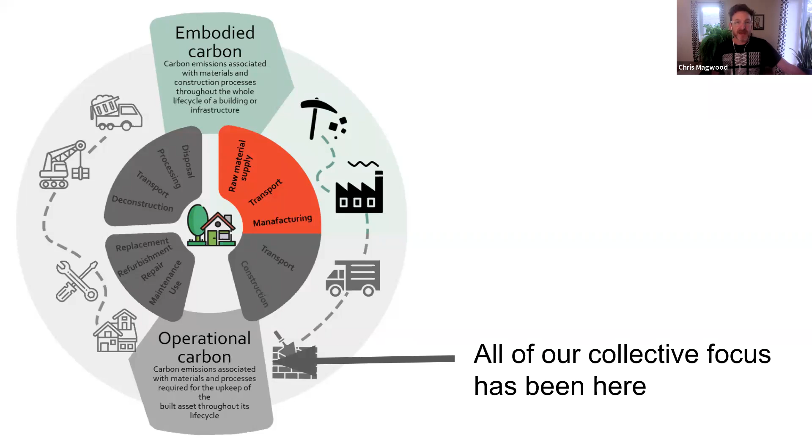So I've been in the building industry for 25 years, and myself and so many other people have put a whole lot of time and effort into trying to reduce the operational carbon footprint of buildings at all scales, with all kinds of interventions in new buildings and renovations, to reduce that very important part of the emissions footprint of a building. But the work that I'm doing now is really examining the impacts found in the creation of the building materials in the first place, looking at how big a piece of the overall carbon footprint of a building that represents, and then what we can do about it.

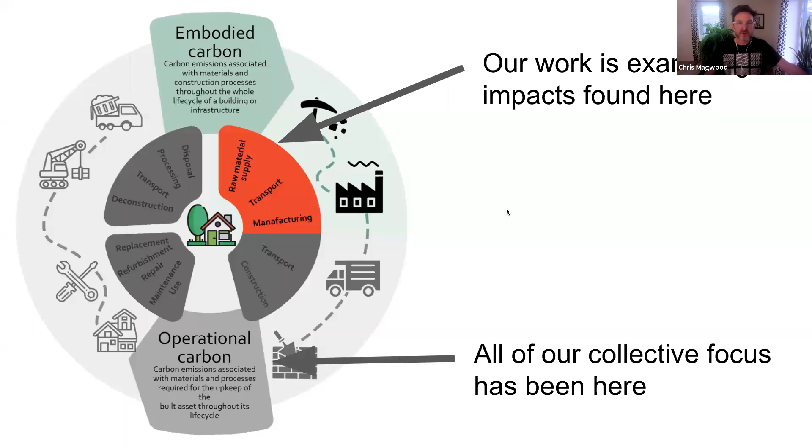And what's interesting is that in that little slice of the overall emissions pie, the vast majority of the impacts for the whole life cycle of any building material happen here at the product phase. It depends on the product, but typically somewhere between 70 to 85% of all the emissions that product will be responsible for over its entire life, including transportation, installation, maintenance and disposal, happens right up front. In life cycle assessment, this is phases A1 to A3, so raw material supply, transport, and manufacturing. This is often called cradle to gate analysis.

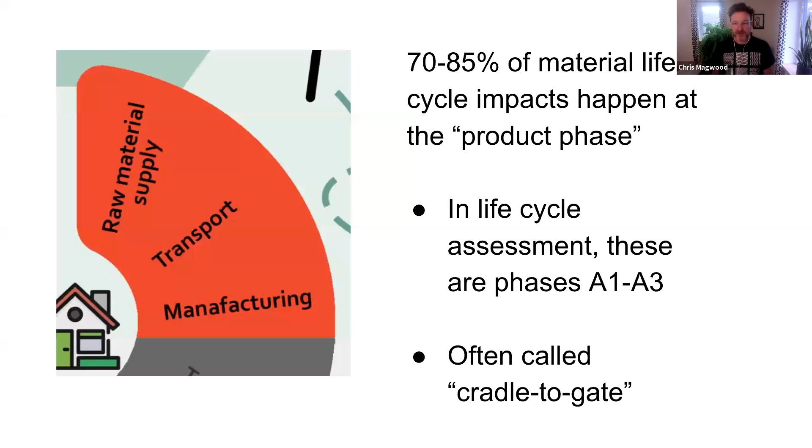So right now we're not looking at what it took to get the material from the factory to a job site or the emissions associated with actually installing that material. When I have looked at that in depth, those two factors have been much smaller than the cradle to gate phase. So, not to say that they're not important, but in terms of the impact that we can have, the lion's share exists in that cradle to gate phase.

And this kind of research has only really been possible in about the last 5 years, as more and more building product manufacturers make environmental product declarations. They are an ISO standardized way of both putting a boundary around what you measure when you look at the impacts of a building material, and the rules for doing that in different product categories. These reports actually look at 7 different types of impact, but we're really just looking at the global warming potential.

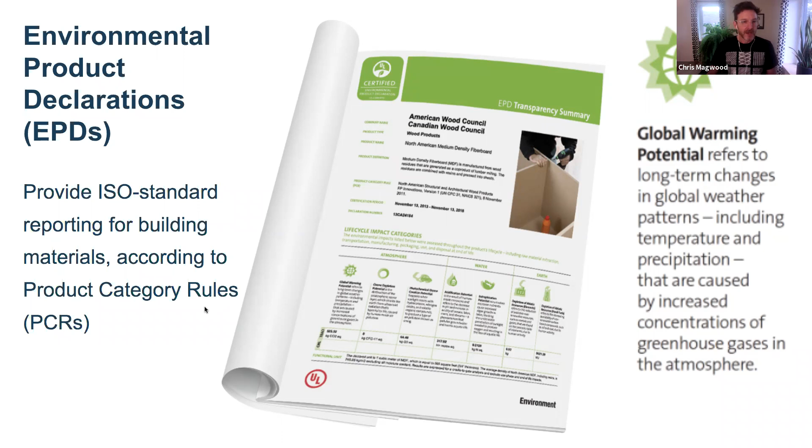So in the end, one of the things an EPD does is say, for a certain amount of this material, this is the global warming potential of that particular material. And so what we've done with CanmetENERGY is make this material carbon emissions estimator tool. They're calling it MCE squared.

It's an Excel-based program where you can put the parameters of your building into the calculator, and then select the materials that you're going to use for the building, or if it's an already finished project, the materials that were used, and you get a carbon footprint analysis of that building.

And it also uses CanmetENERGY's HOT2000 energy modeling software, so you can import the energy model from the building, so you already know what the operational emissions profile of that building looks like. And then in this tool, you add the materials piece, and then you can get a picture of what the overall carbon footprint of that building is going to look like.

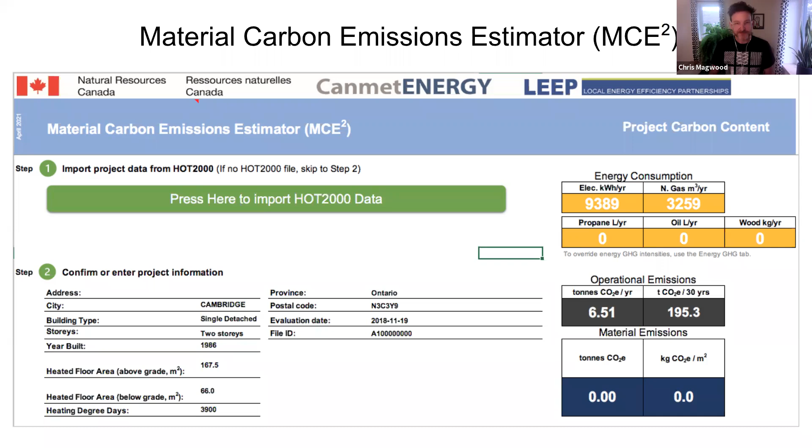So I'm going to dive into some of the results from the study. We looked at 5 different regions in Canada, and Toronto was one of them, so I'm focusing specifically on the Toronto results. Obviously, things differ depending on climate zone and codes. We looked at tier 3, tier 4, and tier 5 energy code versions of 3 different kinds of houses: a bungalow, a 2-story, and the end unit of a row house. I'm just going to focus here on the 2-story, but the rest of the housing types followed the same trajectory.

And so from the operational side, what we saw was that a tier 3, which is basically today's code minimum for energy efficiency, 2-story home in Toronto using natural gas for heating and hot water, had about 3.5 tons of emissions per year associated with those operations, and therefore, over 20 years, a 70-ton carbon footprint for that building at tier 3.

If we take the same building and move it up to tier 4, which is the highest tier you can go to in the energy code with natural gas as the heating system, we drop that to 2.7 tons per year, or 54 tons over the 20 years. So you can see making a building more energy efficient does have the intended result.

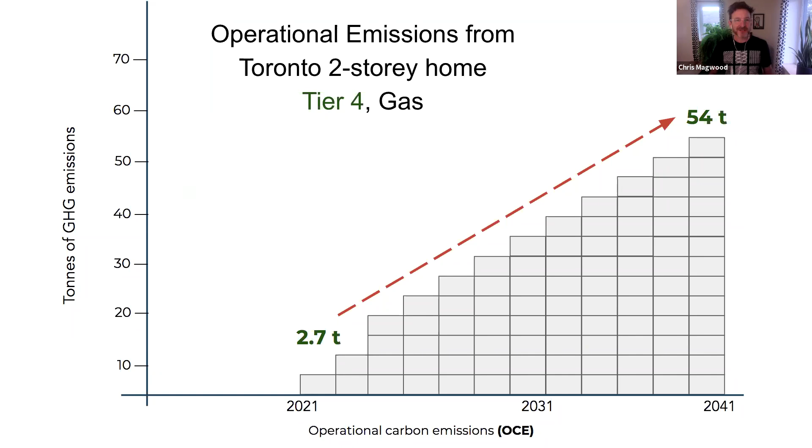But when we looked at the same building with the same level of energy efficiency, but in its all-electric form using an air source heat pump for the heating system, the carbon footprint of these operations dropped dramatically, so that even at tier 3, a regular code minimum building, it was down to under a ton per year. It was 0.71 tons per year, or 14.2 tons over the course of 20 years.

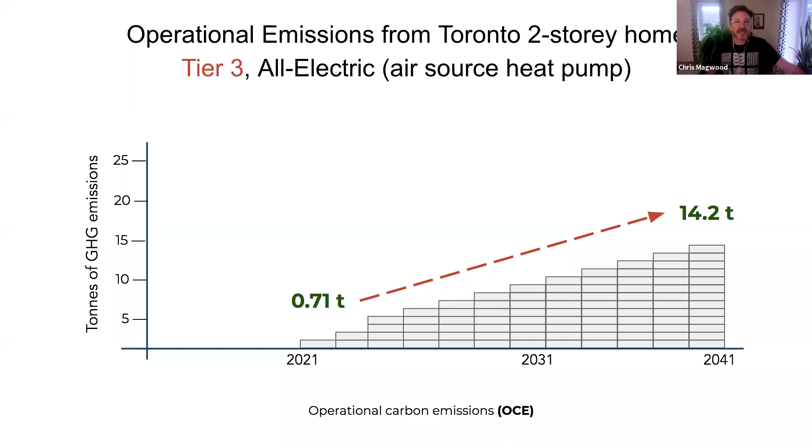So without making the building more energy efficient, just the fuel switch in Ontario made a huge difference to the carbon footprint. And if we move that building up the code,

sorry, I think my slides might be in the wrong order. Oh, no, I am missing a slide. My apologies.

When we move that building up the code to tier 5, it drops it to 0.44 tons per year, or 8.8 tons over the 20 years. So there's 2 things we can see here. One is the fuel source makes a huge difference. If we can get our buildings off fossil fuels and onto clean electricity, there's a massive drop in emissions. And also, moving the buildings to be more energy efficient also has the positive impact that we would want.

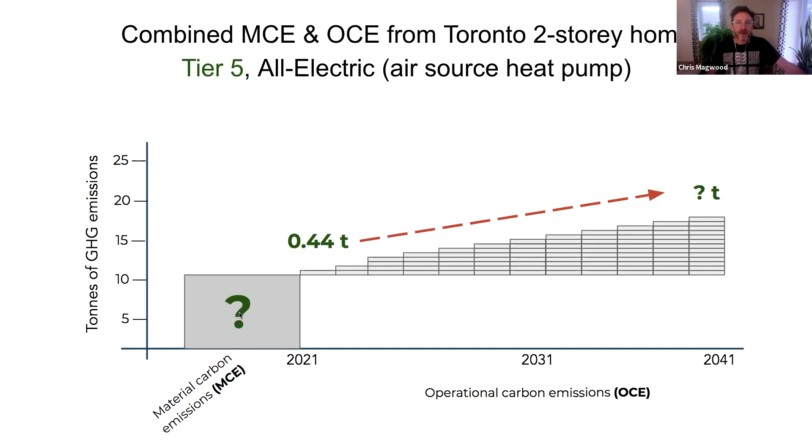But what hasn't been factored in until we started doing this study is what is up here: what are the emissions from the materials for the building, because that will be carried with the footprint of the building as well. We've typically just thought about the number here for operations as what the building is contributing to climate change, but without knowing where it starts, we don't really know what the total impact is on the climate.

And so the results from the study are pretty stunning. If we take that same two-story building and use a set of materials that would be, in every category, the highest emission materials, that two-story house has 138.9 tons of emissions associated with making the materials. So if we've solved this part on the right for operations and gotten that down to 8.8 tons over 20 years, that's great.

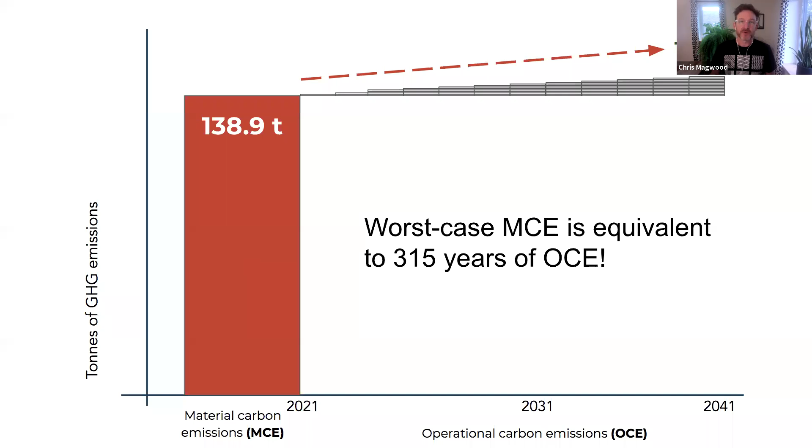When we look at how much the materials could be impacting that building, it's huge. So in this worst case scenario, and the worst case scenario is not an unusual building to be built, so this isn't a sort of crazy version of a residential building in Ontario, the material carbon emissions are equivalent to 315 years of operating emissions. So in other words, it doesn't matter how energy efficient we make the building; if it has this kind of emissions profile from its materials, this is all the impact. In the window that we have to deal with climate change, it means everything, and the operating emissions mean a lot less. So this was the worst case scenario.

Now the scale sort of changed here, because the first one was so high. But if we use a more moderate, mid-range selection of materials for this house, and this one represents the way quite a few buildings would be built in this region, that initial material carbon footprint comes down to 31 tons on the material side, and obviously the emissions for operations stay the same. So this building now has a 40-ton carbon footprint over 20 years, but again, 3/4 of that is right up here up front in the materials. And so it's going to take 71 years before the operating emissions are the equivalent of these material emissions.

So, the worst case scenario is terrible, but even the mid-range scenario is not great. It still really puts a lot of weight on the material emissions as the lion's share of what the building's responsible for in terms of its carbon footprint.

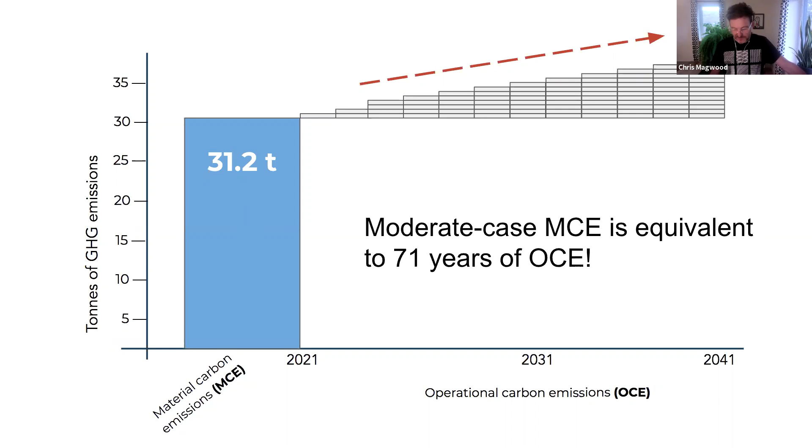Now, the next one here is really interesting. So we made a model of the same building, and we used the materials that had the lowest carbon footprint, that are code compliant and widely available in the market today. And what's really interesting is suddenly the material profile is actually a negative number. I'm going to explain that in more depth later, but essentially what's happening here is that this building is using mostly insulation materials, but some interior finish materials as well, that have net carbon storage. So they're plant and fiber-based materials where the carbon drawdown that plant had in growing outweighs the emissions that happen when that was turned into a building material. And so it carries this negative carbon footprint.

And so this result to me was extremely exciting, because this is the profile of a building that any builder in Ontario could be building today. These are all materials that are affordable, accessible. Everything is there to achieve this kind of result in a building, in a house, right now today.

And so what's interesting here is that the materials are about 20 tons of net storage. So when we add the 8.8 tons of operational emissions at the end of 20 years, the net footprint of this building is less than zero. This is now actually a climate drawdown building. This is doing the thing that everybody's wondering about: how are we going to get carbon out of the atmosphere, not just reduce emissions, but bring them down below zero. And here's an example of a model building that can do just that.

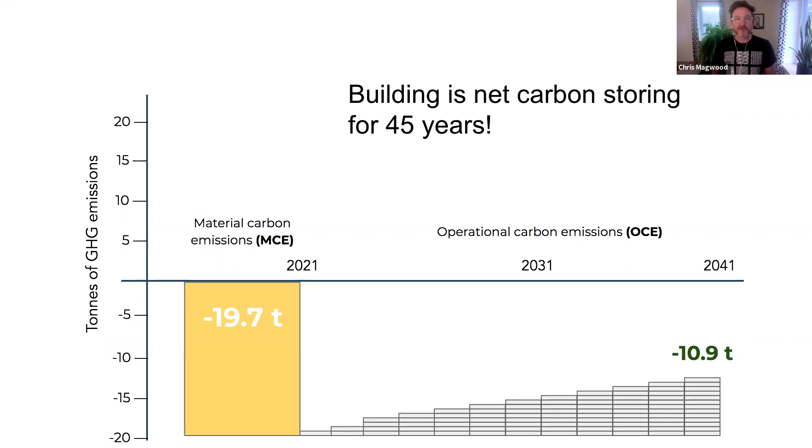And then if we take it one step further, this building is going to be net carbon storing, when we take into account the storage in the materials and then the emissions from its operation, for 45 years. So that gets this building out of the way of causing any climate issues over the span of time that we really need to deal with climate change. And that's a hugely encouraging result.

And here's a more encouraging result, which is if we took materials that are the best possible materials for carbon footprint. So these are all materials that people have built code-approved buildings with in Ontario, but they're not common materials and they're not all code-approved. Some of these materials require alternative compliance pathways for a builder to be able to use them.

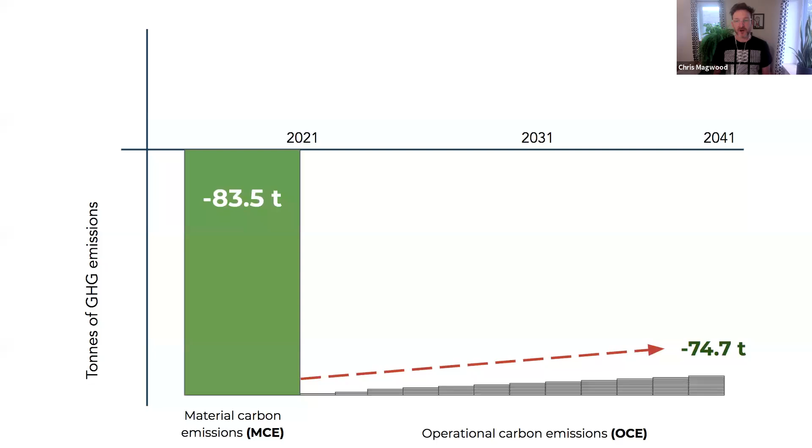But the situation gets even better here, where this building is now responsible for storing 83 tons of carbon up front. And that means that in 20 years, it's still a net 75-ish ton building in terms of carbon storage. And this will continue to be carbon storing for almost 200 years. And it's hard to imagine a result this positive as we're figuring out what do we do about the climate. Here is one of the really major answers about what we could be doing to improve the climate.

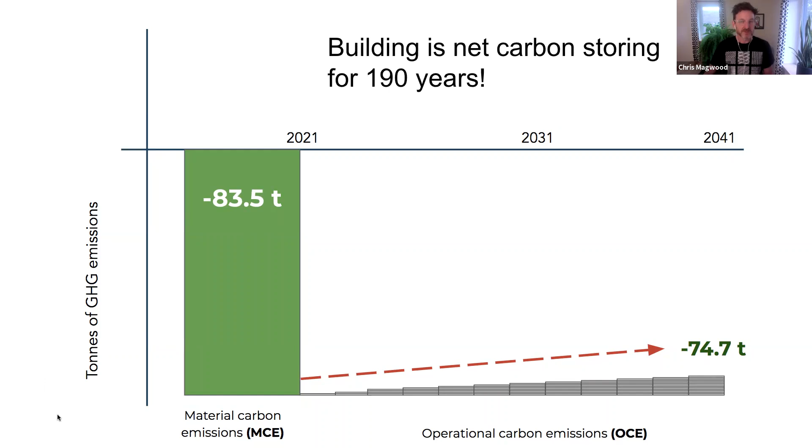So those were all based on sort of model buildings from NRCan's typical housing typologies, and they kind of use these three models of a bungalow, a two-story, and a row house. Right now, we're working on a very similar study, thanks to a grant from the Atmospheric Fund and our partners at Passive Buildings Canada. We're looking at 100 homes in the GTHA and doing case studies of actual as-built homes, which is the first large-scale benchmark study in the world.

And so if we look at the NRCan study, the results for the two-story building, the worst model was 138 tons, the mid-range model was 30 tons, and the best conventional materials model was about 20 tons of storage. And of the buildings we've run, we're partway through these 100 homes in Toronto. Of the two-story results, right now, the worst case building in the GTHA has had 88 tons, and the best building has had 50 tons.

So, interestingly, the worst case scenario isn't as bad as the NRCan study said, but the best case scenario is very, very far from what the best case scenario could be and was in that NRCan study. So the as-built results in Toronto right now are sitting very much in the middle of the worst to moderate range from the NRCan study. So I think that tells us that there's much that could be improved in terms of fixing the emissions profile of homes in this particular region.

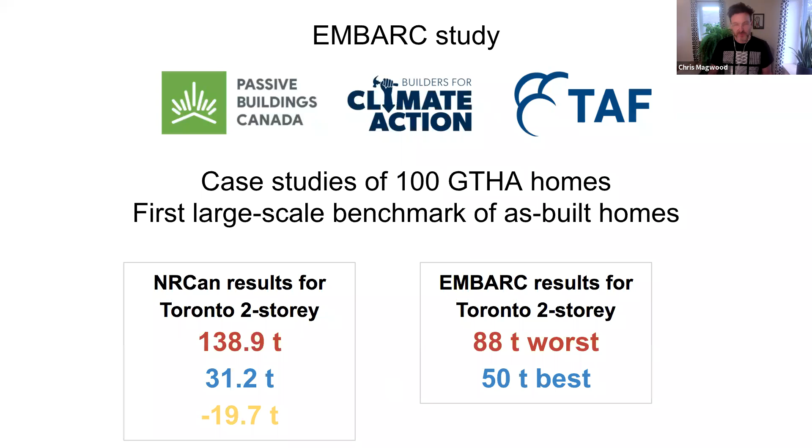So really we have concrete, insulation, and cladding as the categories that have the biggest impact, and where all of us collectively could be making the biggest impact in terms of driving reductions. Windows, that are a fairly big contributor, they're tough to make a difference. It doesn't really matter what kind of window framing material you use or the brand of window. Most of the emissions from windows are from making the glass, and all glass has pretty much the same emissions profile right now. So there's not much we can do to drive windows down, but there's a lot we can do to drive down concrete, insulation, and cladding results.

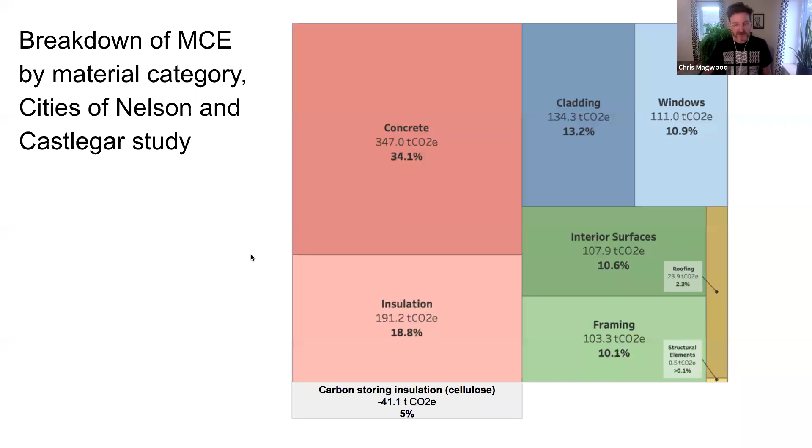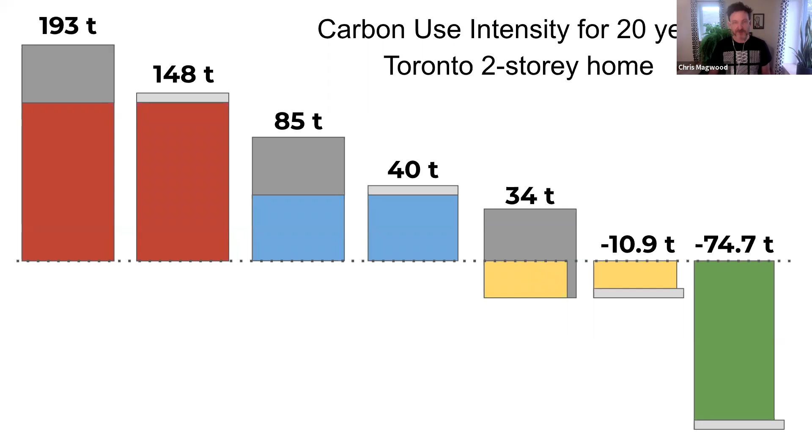Now, this is something that we haven't studied yet, but I would really like to. And if anybody is interested in partnering on a retrofit study, it's something that our team would love to do, because as incentives come along for retrofits, the same thing is going to happen in the retrofit space as I'm pointing out here in the new construction space, which is if we retrofit with especially insulation materials that have a really high carbon footprint, the emissions from the materials may very likely outweigh the emissions reduction savings from the operations through a 20 to 30-year window, so that actually the retrofit that was supposed to reduce the impact on the climate could actually make it worse.

And I'm seeing a lot of these renovations starting to happen here in Peterborough, where I am, and I'm sure they're happening everywhere. And to me, this is a red flag that we really, really have to react to, because the worst scenario is that we spend lots and lots of money and lots of time telling people to do something that we think is good, and then find out that we're having the opposite effect that we wanted.

And I think it's also possible to end up with a result where the material impacts of the retrofit just end up balancing out the emissions reductions that are achieved by doing that retrofit. And again, you spend a lot of money, and you may not over a 20-year period be doing worse for the climate, but you haven't actually done anything to help it.

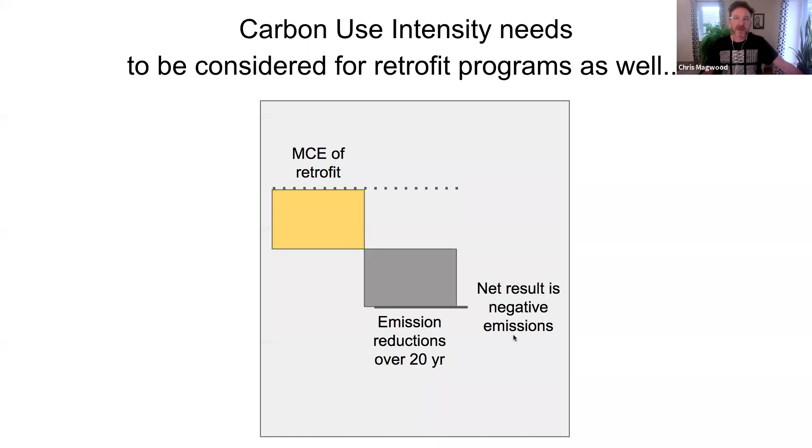So what we really want is for our retrofit programs to do the same thing. If ideally we can be retrofitting with very low carbon or even carbon storing insulation materials, then we're actually causing a carbon drawdown to start the project, and we've reduced the emissions for the building. And so now we're actually starting to have the kind of impact on the climate that we want these retrofit programs to have.

Now I'm going to talk a little bit about the carbon drawdown side and the carbon storage in materials. It's maybe a little bit hard to wrap your head around, but basically, as I explained, if you have a plant-based material, and sometimes there are mineralization versions of carbon storing materials too, where carbon has been drawn out of the atmosphere recently. And I say recently because the impact of wood and wood products is right now fairly uncertain, because in order to count the carbon storage in wood, we have to know, does taking the tree out of the forest have a net positive or a net negative impact on the climate? And we don't know that for wood products right now.

So here I'm talking about materials that come from either waste streams from our recycling systems, or from forestry or agricultural residues, where that material was already both grown and harvested and was about to be returned to the atmosphere. That carbon was about to go back to the atmosphere, and instead we turned it into a building material and kept it out of the atmosphere.

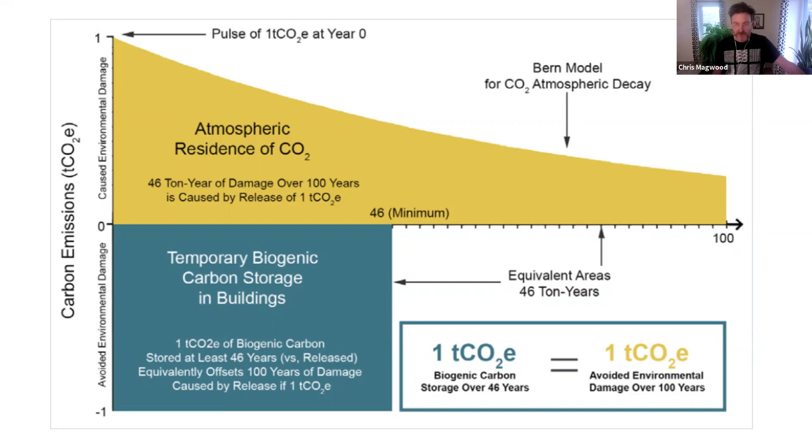And so if we use ton-year accounting, we can also account for materials that either have a shorter or longer residency in the building. So if you have something like a flooring product that might only last 20 years, if there's 100 tons of carbon in that material, but it's only in the building for 20 years, it's had the equivalent drawdown impact of 43 tons. If it's 100 tons and it's there for the 46 years, it's had the equivalent impact of drawing down 100 tons. And if it's there for longer, in this case 80 years, it actually ends up with an impact bigger than the 100 tons that's stored in the building.

And there's really interesting work going on both in Europe and the US now, where this type of carbon accounting is being used to develop carbon removal certificates in North America.

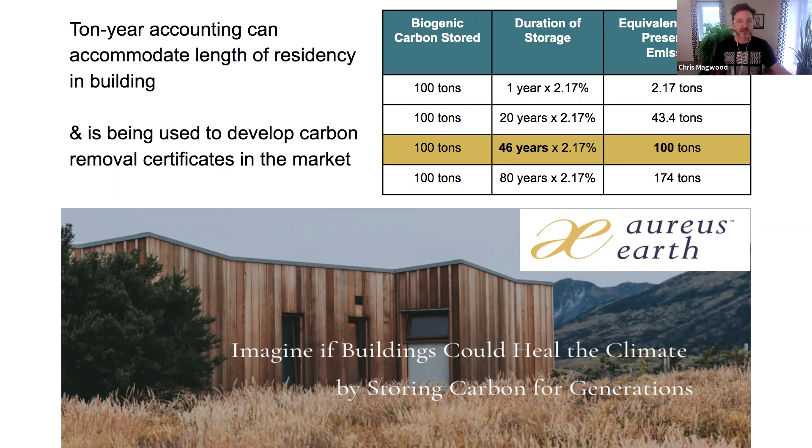Is the first one that's actually looking specifically at buildings and specifically at being able to offer carbon credits and therefore pay builders to store carbon in their buildings.

Now, the subject of cost always comes up. How much is it going to cost to make one of these low carbon or carbon storing buildings? And this is something that I would like to study more. But what we found in the NRCan study was that there was no direct correlation between cost and the material carbon impact of materials. So sometimes the lowest cost material also had the best carbon footprint.

Sometimes the highest cost had the highest carbon footprint. Sometimes the opposite could be true, or the results could sort of fall anywhere in between. So it's not to say that the zero carbon building is going to cost less or cost more. It's to say it won't necessarily cost less or cost more.

And this is something that in our own practice here at the Endeavour Centre, we found that we've been able to do carbon storing buildings at market rates. And I think in discussions with builders, it's certainly something that's not necessarily going to cost a lot, and certainly doesn't have some of the same cost impacts that making buildings much more energy efficient often have.

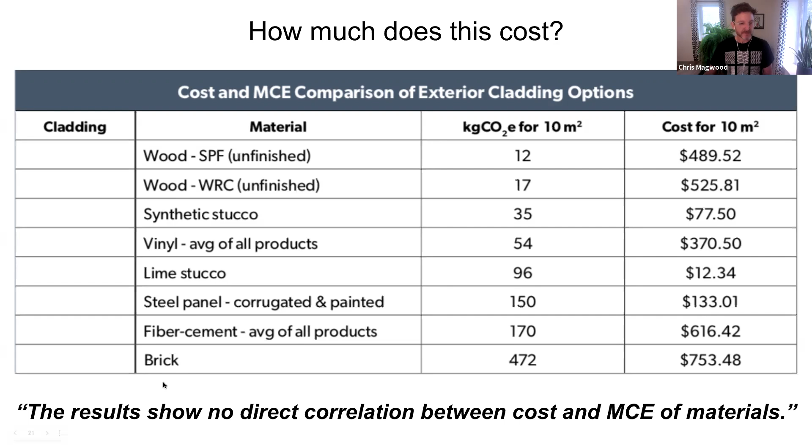So there's other sort of interesting stacked benefits of these low carbon building materials. One is that when I looked at the ingredients of all of the materials in the study, I found that the low carbon and carbon storing materials in every single category, not a single material I looked at contained red list chemicals or chemicals of concern. So, a move to this kind of material palette also means that we're going to be improving occupant health and safety inside the buildings.

Again, with waste, the waste stream doesn't have to absorb any of the chemicals that are embedded in those materials. And interesting for regional and provincial governments, these materials all have local sources. The fibers for most of these materials come right from our regional recycling streams and our agriculture and forestry residues. So there's an abundance of the sort of raw materials to make these building products out of, right here in Ontario and all around the GTHA.

And also potential for local manufacturing, because in a lot of cases, you would ideally be using local raw materials to make local low carbon building materials that are then used in local buildings, and sort of be building a stronger supply chain that involves local manufacturing as well as construction.

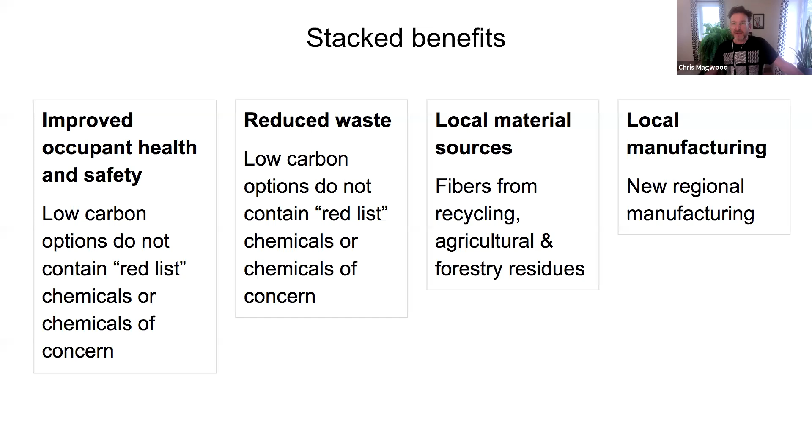And then I'm just going to finish up with some thoughts on things that municipalities could be doing to help move this along. Right now, I'm working with the cities of Nelson and Castlegar in BC on figuring out some incentive programs that they're going to offer, and I'm starting to do that with Vancouver later this month.

So some of these things are already starting to show up in some Canadian municipalities, but things that we've talked about with Nelson and Castlegar are no cost things like simply awards and/or recognition for builders who are achieving very low carbon, making sure that they're getting some marketing and some public visibility out of their efforts to make really low carbon buildings.

Education, the kind of webinar you're at right now, if people within your municipality can become familiar with this topic and begin to sort of raise awareness of material carbon emissions in the local building and design community and among your citizens, I think that would be really helpful.

And then there are sort of more direct approaches like incentives for low carbon buildings. So in Nelson and Castlegar, we're talking about sort of a tiered approach where they set up some targets for material carbon emissions and sort of reward builders either with money or with permitting preference for meeting those thresholds.